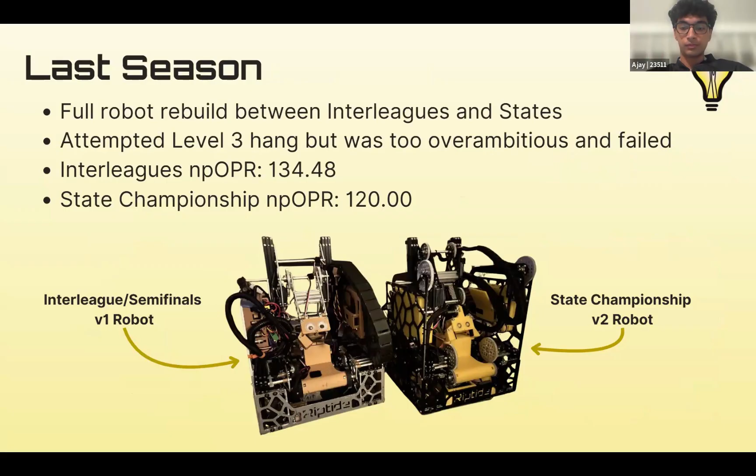And this planning change really helped us because we're able to try out these mechanisms in a low risk setting, and then better implement them in season, as we did with Swerve, which we'll talk about. The other thing with hardware is we really tried to make our mechanisms as modular as possible, so that we could iterate on them without doing a complete rebuild.

Ajay mentioned we did a full rebuild from interleagues to states last year, which was less than a month. And we found that redoing everything from scratch took a lot of time, and it wasn't as efficient because we were only making minor upgrades. So this year we tried to mount our mechanisms in a way such that from the very beginning, we're able to quickly take them off, improve them, and then reattach them to save as much time during season. And then Arush can talk a little bit about the software changes we also made.

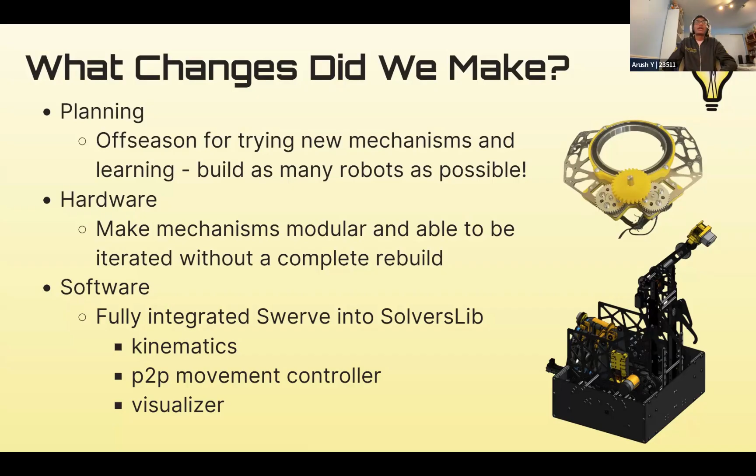So one of the major projects we took on this off-season was making a multi-chassis. With modularity in mind, this chassis has about 75 different mounting holes throughout. You can see some of them, especially on this back plate here. It has 4 different configurations for our hub mounts, from all of them on one side to what you see here with one on either side.

There's 3 different places for mounting odometry. Though we use 2-wheel with Pinpoint, it allows us to essentially mount the wheels in a way that this robot can work for any design. The point of this multi-chassis is essentially to function for any different archetype of robot. It can function as a swerve drivetrain or a mecanum.

And it's kind of similar to the strafer chassis in that way where you can put essentially anything on it, you can turn it into absolutely anything, and this robot can work for basically any season. So the reason we did this in the off season was essentially to limit the amount of time we need to work on our robot during the season. We don't have to design a drivetrain if we have one that works for essentially every season, built in the off season. So that was one thing we made.

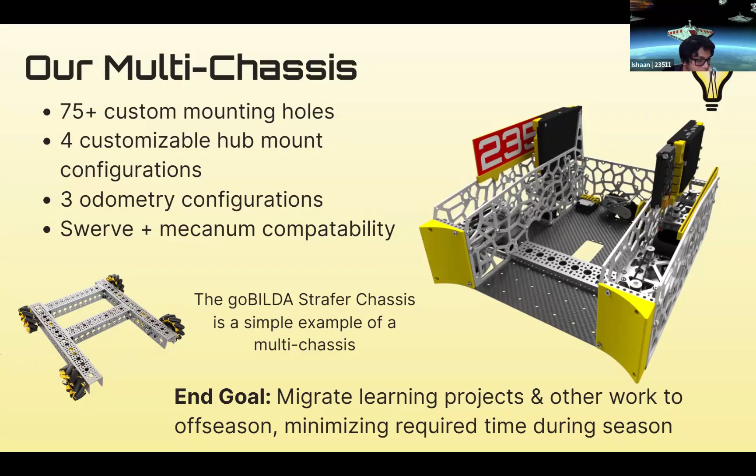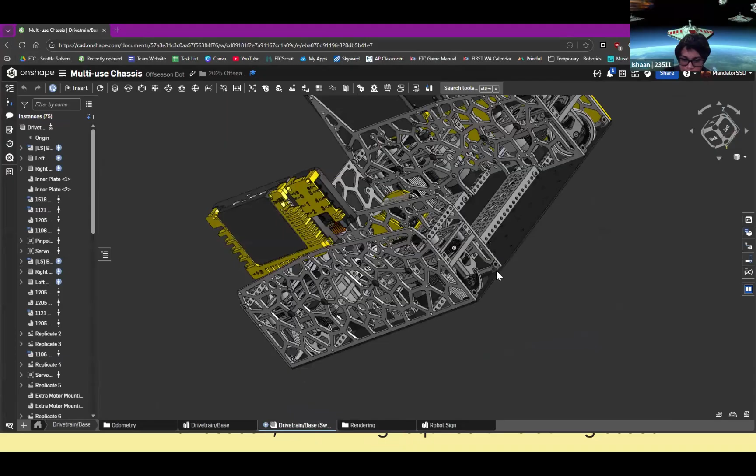So I'm actually going to give a bit of a CAD walkthrough on this one here. So first, let's start with the actual drivetrain here. So you can kind of see this is the multi-chassis I was talking about. This one has swerve modules in it. You can see on the bottom, like I was talking about earlier, you have those three odometry mounting points. These cutouts for swerve module, which you can use either mecanum wheels or swerve on.

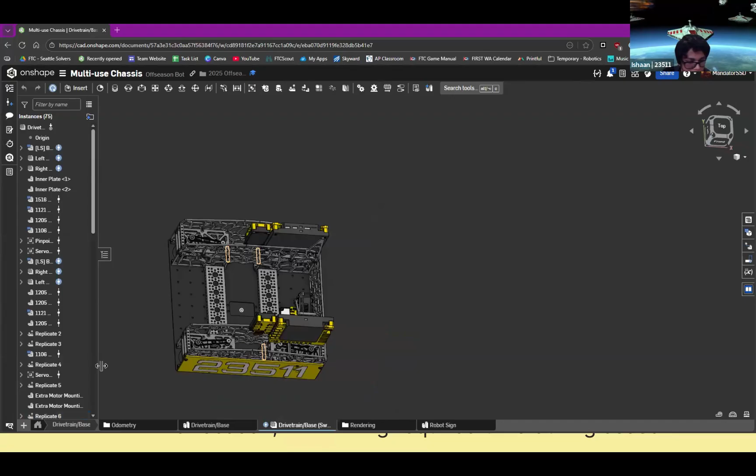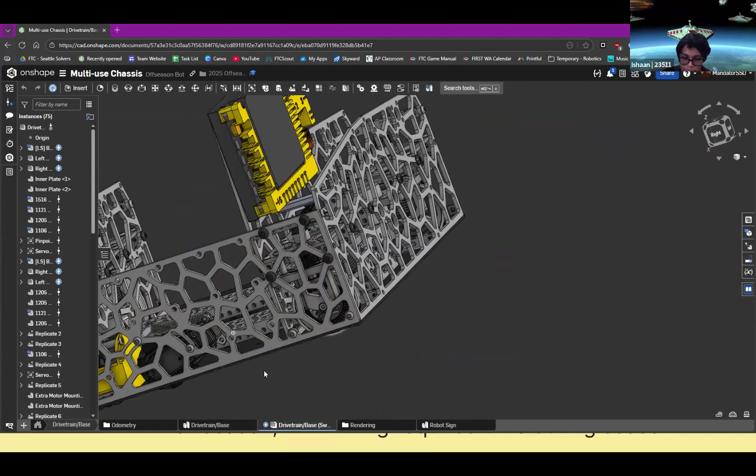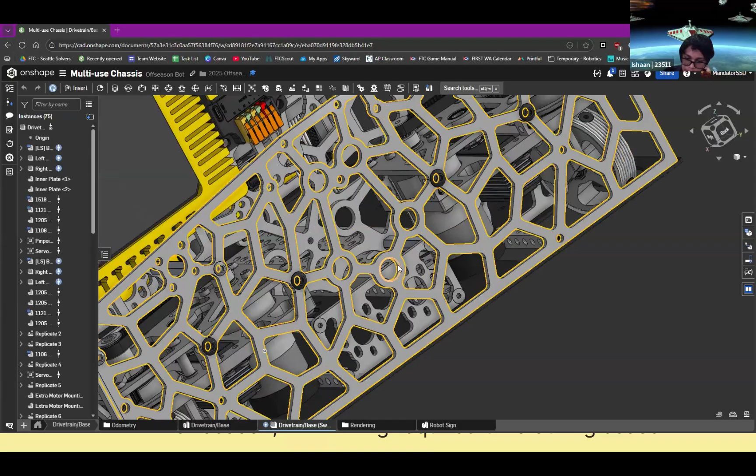With this robot, all these mounting holes, we don't have to do that because we can essentially make any change to this robot. We can move things around. We don't need to worry about recutting new plates or anything like that. So it's kind of like a strafer chassis, except you're getting all the benefits of a parallel plate drivetrain and the custom weight savings and everything in this drivetrain here. So best of both worlds.

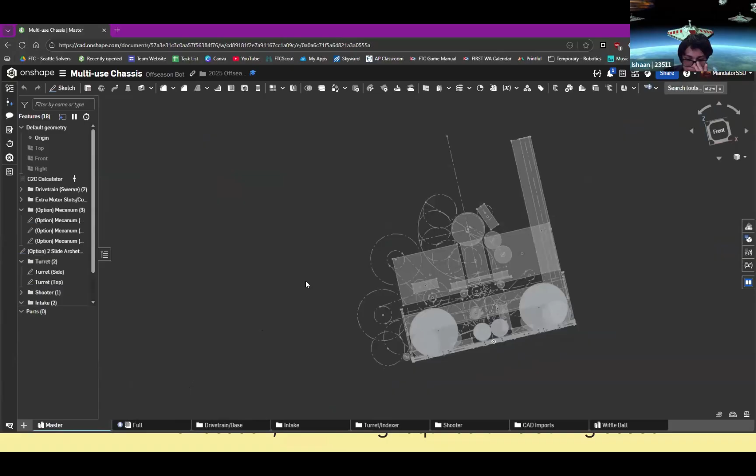So we're going to go into a bit on how we planned out something like this. So this is a master sketch here. For those of you who don't know what a master sketch is, it's essentially a series of sketches that allow us to plan out our robot without building it physically or without having to design the full thing. Do this before making the robot. It allows you to plan out where you're going to put every single item here.

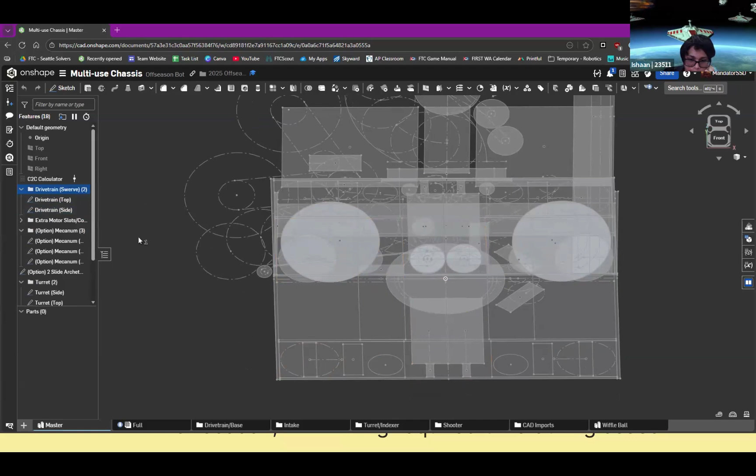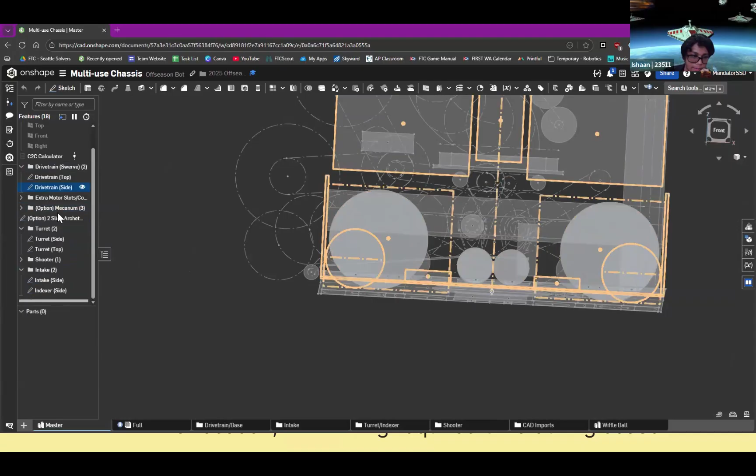So you'll see we have a bunch for our drivetrain here. You'll see lots of different pulleys throughout, right? So you can essentially mount anything here. These are all major points we could find for different archetypes. So on the side you'll see we have turret, shooters, slide archetypes. So last year the main one was the two slide archetype in Into the Deep, right? That was what we used in our robot.

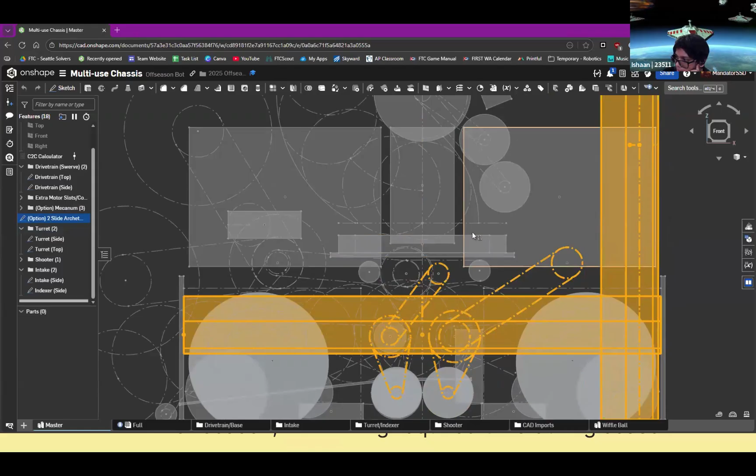And you can see here, we kind of planned for that even with our robot this year. We want to make it able to function for that. So we added all these different bearing holes for pulleys and things if we ever have to make a robot like that, right? So I'm going to open up the plate so you can see kind of how it affected it.

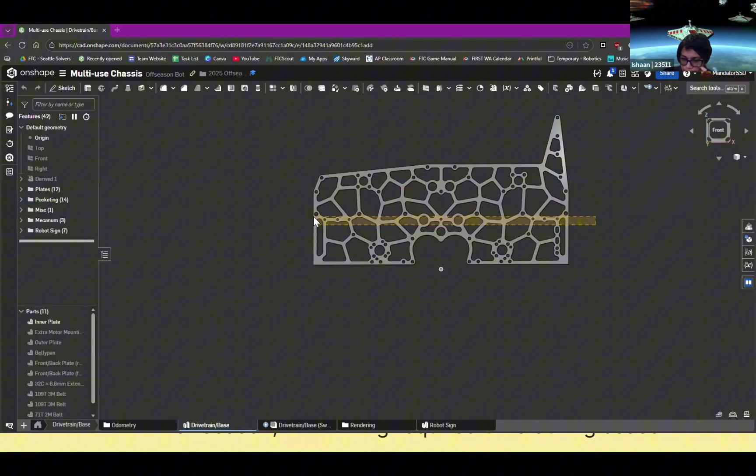So you can see here, these are the vertical slide mounting holes right here. This entire top lip of this plate is just to account for the vertical slides. And same thing for these holes on the bottom, this line of vertical holes. That's all just for horizontal slides right here. You can essentially mount a 14-inch BWT link slide.

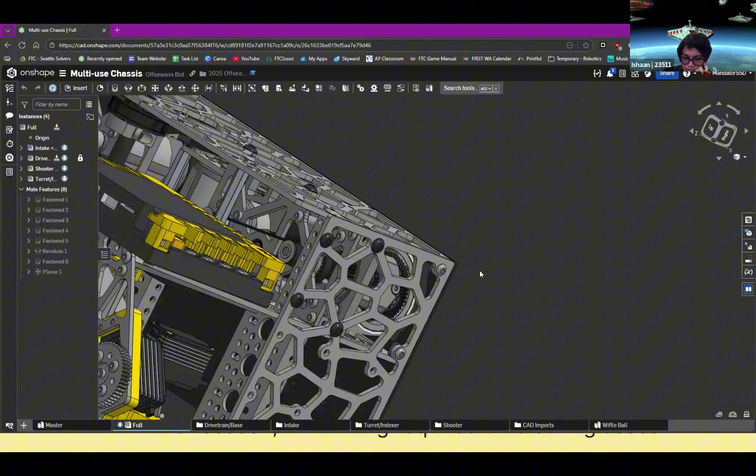Those are what we use on our robot, but you can essentially make a two-slide archetype on here, or you can do something like a turret and shooter kind of one. So this off season we actually tried to develop a wiffle ball shooter robot. So you can see here active intake and everything all mounted on the same chassis, right? So the general idea is you can mount essentially anything on here. One of the other things we focused on, like I said earlier, was mecanum versus swerve.

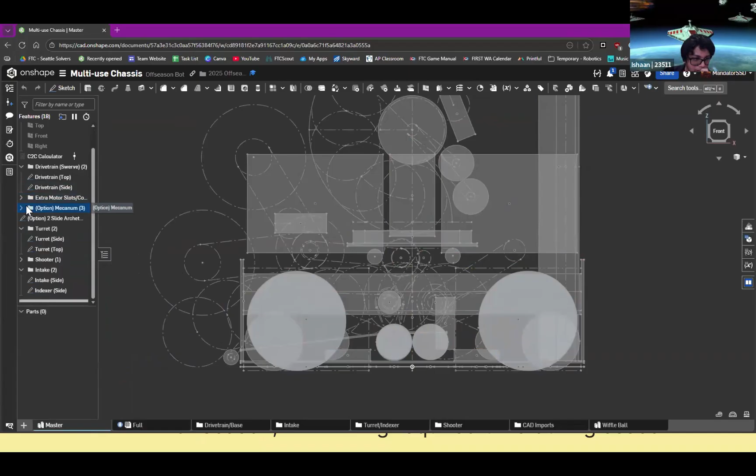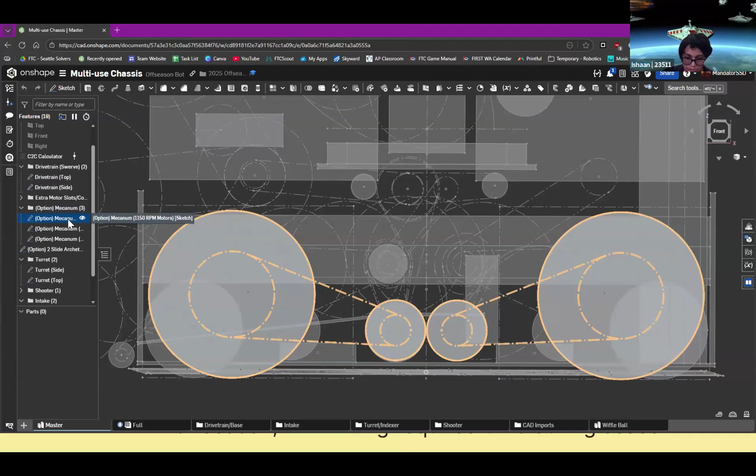So in the planning, we actually had to involve a lot of different options for it. If you want a chassis that can be used anywhere, you're going to need it to basically have a lot of different contingencies or possibilities for design. So one thing you'll see is we have three separate mounting options for mecanum, depending on what the robot needs to do or what else we want to put on the robot that might take up the same space. You have these essentially center-mounted motors here.

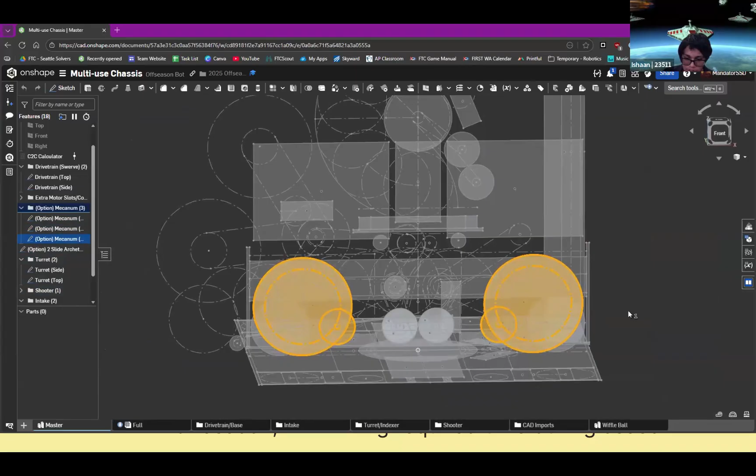Then you can have them mounted even higher here where you have two stages of pulleys, right? Or you can even go through a singular stage of gears. You have all these different options because you want this chassis to be essentially as modular as possible. So we can essentially build anything on this. That was the main focus here, modularity. This drivetrain is essentially something you can turn into absolutely anything, any type of archetype, any type of robot.

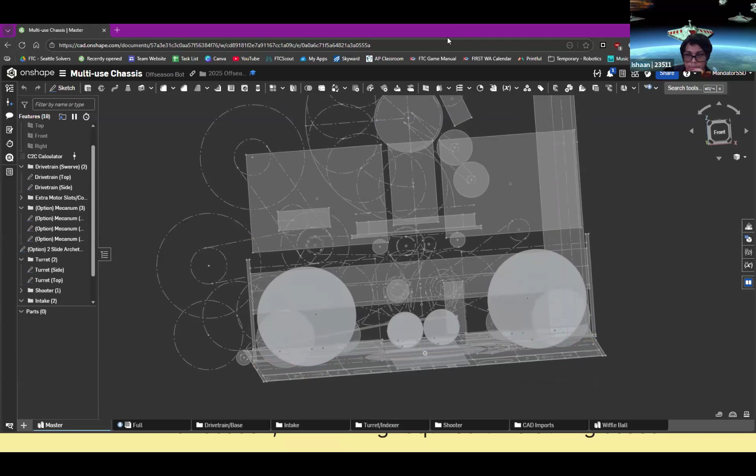So now Saket's going to tell you a bit more about the swerve. Yes. Yeah, I'm gonna share my screen to take over. Okay. A little bit before the swerve, Arush is gonna talk a little bit about the software planning that also went into our chassis.

So yeah, Arush. Yeah. So one of the biggest things that our team did in order to make our swerve successful on the software was working on our code without a robot. There's actually a surprisingly large amount of things that you can do without a robot to help you make sure that you can complete your tasks effectively. And this is really important, especially for us, because Washington has a very tight deadline. Especially after the first competition, you're going to have competitions coming out nonstop every 2 to 3 weeks.

So one large factor contributing to our success in early league meets is that we actually theory coded a lot of our systems early while our robot was still being built. One thing that we did was our launcher math. So this is getting the velocity from the distance of the robot and other similar things for our turret and our intake. This also includes structure for our files, as you can see in the bottom right corner, which is effectively creating folders and directories and entries to help organize our code. This can all be done without our robot.

Additionally, teams can also learn about libraries. This is things like popular pathing libraries like Pedro Pathing or Roadrunner, or command-based libraries like our very own SolversLib or alternatives like NextFTC and Mercurial. And then teams can also integrate them with each other and also create autonomous paths with visualizers beforehand, to make sure their team has enough time to actually test out everything.

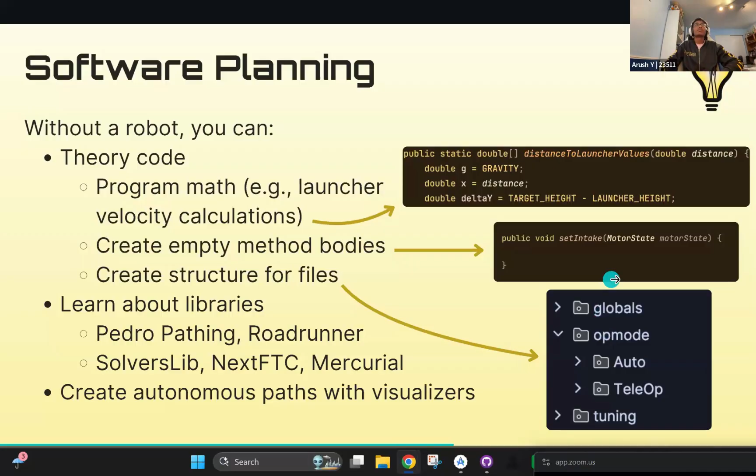Yep. So moving on to specifically swerve, how we were able to implement a complex mechanism. So there's going to be an overview of what we did with swerve. Firstly, if you don't know, swerve is essentially four different high traction wheels that are able to rotate in any direction, and they give you increased traction and movement speed in all directions compared to mecanum, which can be inefficient while strafing or moving diagonally. And we really wanted to try it out because it would be potentially useful across seasons. It wouldn't be just used in one season, but theoretically you could use it every year,

just like how teams use mecanum every year. However, it does come with a lot of difficulties because you are running 4 extra servos and sensors for figuring out where the wheels are actually facing. And all of these need to be operating efficiently all the time in both hardware and software. In hardware, this means your power transmissions need to be efficient, so you're not pulling too much power. And in software, you need to make sure you have good loop times, which Arush will talk a little bit about how we optimized, so that we have precise control over where the wheels are facing.

So all in all, this adds a lot of complexity for just having the basic functionality of your drivetrain moving. So it took us a lot of time to actually make this possible. We actually spent our 2024 off season developing our swerve drive, but we saw that it had issues with power draw, with accuracy, and also in software as well, so we weren't happy enough to use it in season.

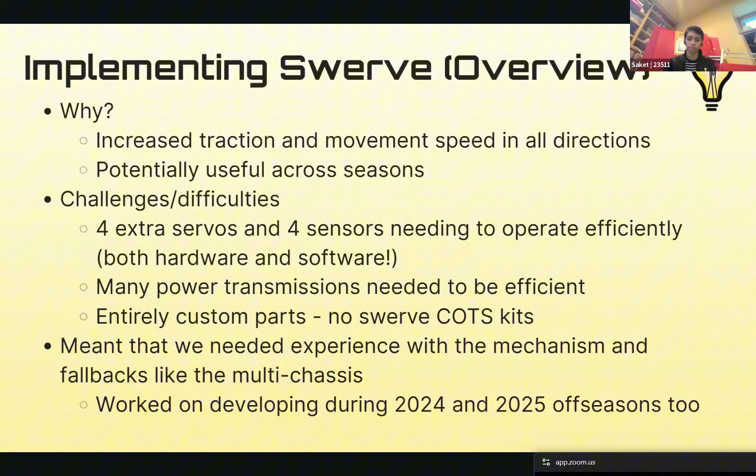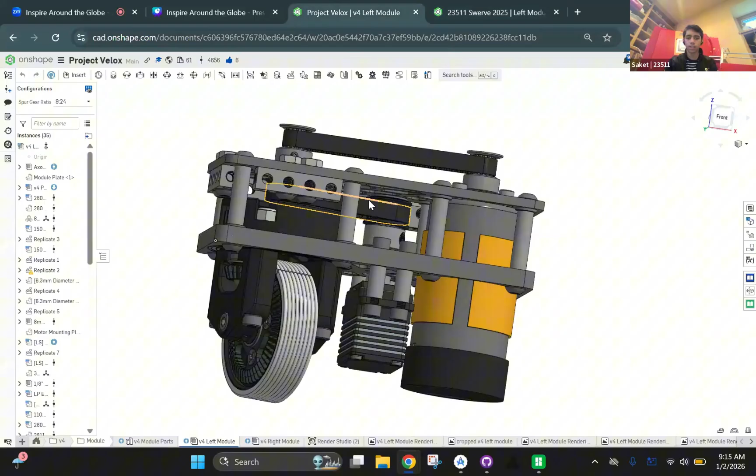So, like Ishaan did with the multi chassis, I'm going to talk a little bit about our 2025 Swerve module. I'm not going to go too much into our 2024 module, even though it is public. But the 2025 module, you can see it's slightly bigger, but you can see it has a lot less screws and nuts, which is something we really tried to focus on in trying to make our entire swerve a lot more modular and accessible.

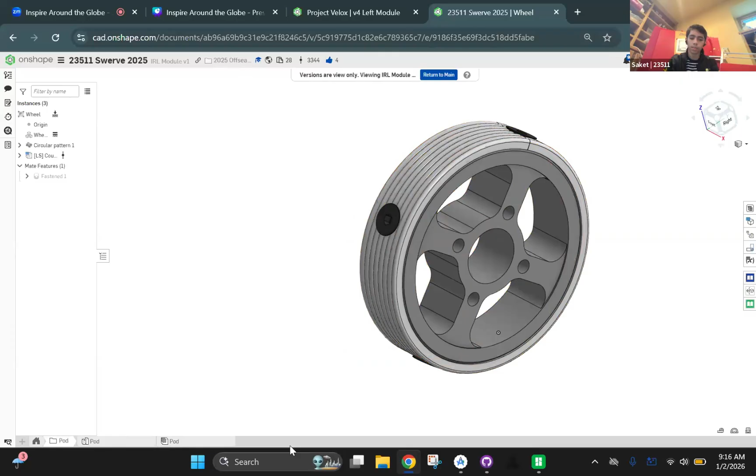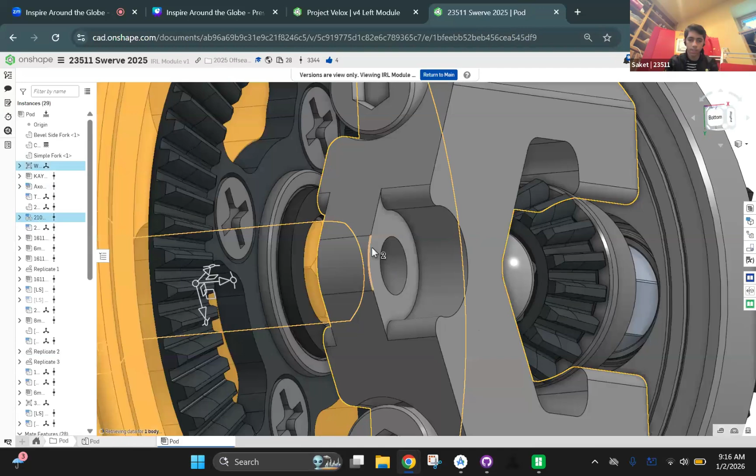Starting out with how we make this modular, we actually split up our entire swerve module into three different parts. So we start with the lowest level, which is the wheel. This is just a simple aluminum wheel with some tread on it, but you can see that it's modular within the next level, which is the pod. So by removing this screw and this screw, if we hide these two screws, in real life, you'd unscrew them. This entire axle over here and the wheel that's on it are basically able to slide out from the bottom. So we actually have a slot over here that allows you to just take this entire thing out the bottom.

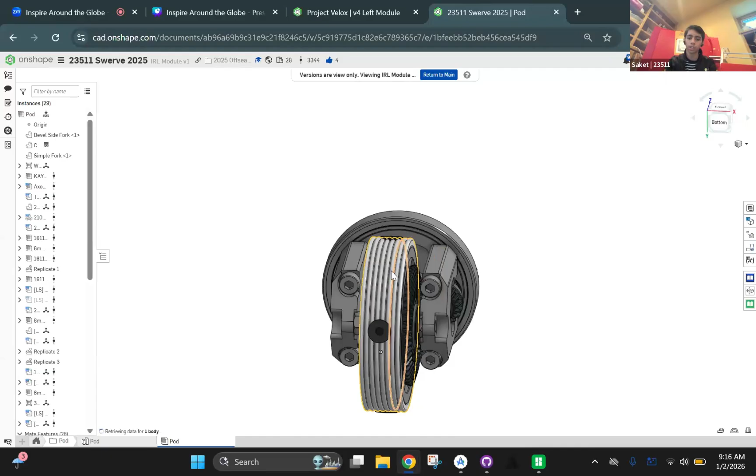And we realized that using accessibility through the bottom of the robot was going to be very efficient because a lot of the times you have stuff on top of your swerve modules or on top of your mecanum wheels on your drivetrain. But there's not usually much happening below your robot. So we kind of made everything accessible from the bottom.

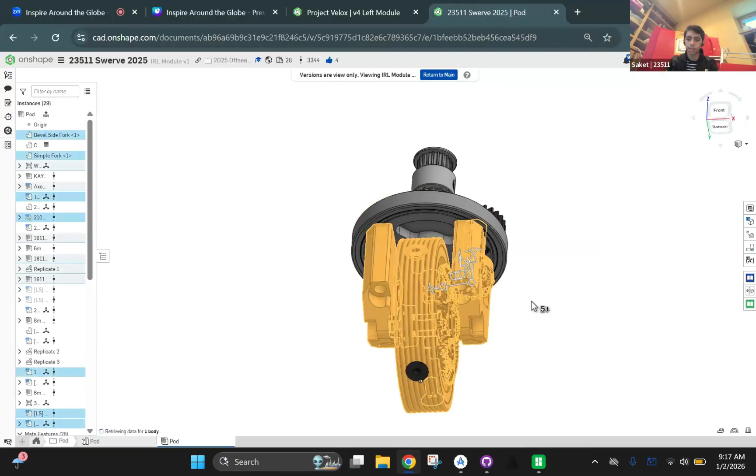This also means that not only do we have the wheels modular like that, if you unscrew these four screws, then we're essentially able to take out everything on this bottom half. So everything over here is just able to slide out and we're able to access anything. So if we need to replace the tread, tighten any screws, anything like that, we're able to have access to that. But it doesn't just stop there because we go further in the next step of the module.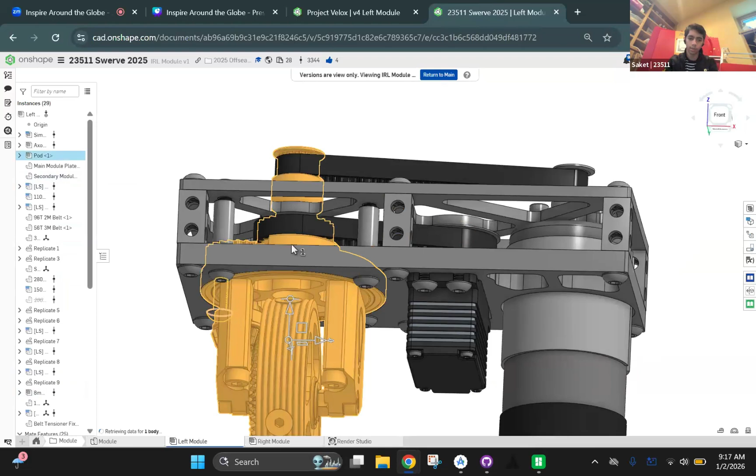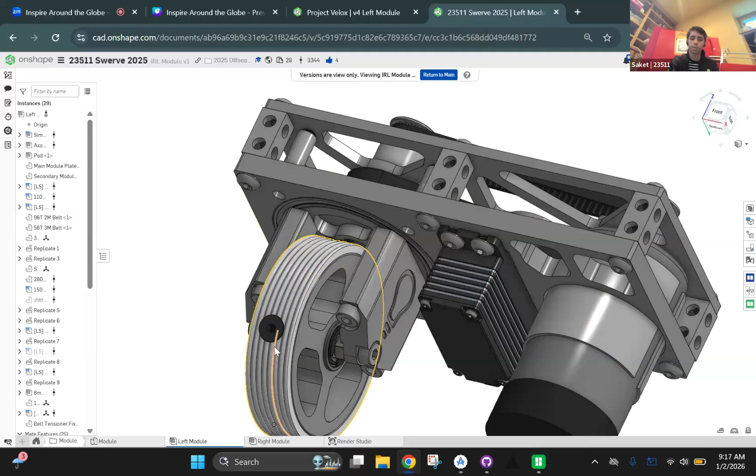We're actually able to take out the entire pod, so that entire previous subassembly. If you loosen some set screws at the top and you remove these four screws, again, accessible through the bottom, just so that we have full control over being able to remove things. So if we hide these four screws, there's actually nothing constraining the pod from just being slid out the bottom. And again, we're able to access anything. So if we want to re-grease the gears for higher efficiency, we can through that. Or if you need to tighten any screws inside here, it just makes it a lot easier to do all that.

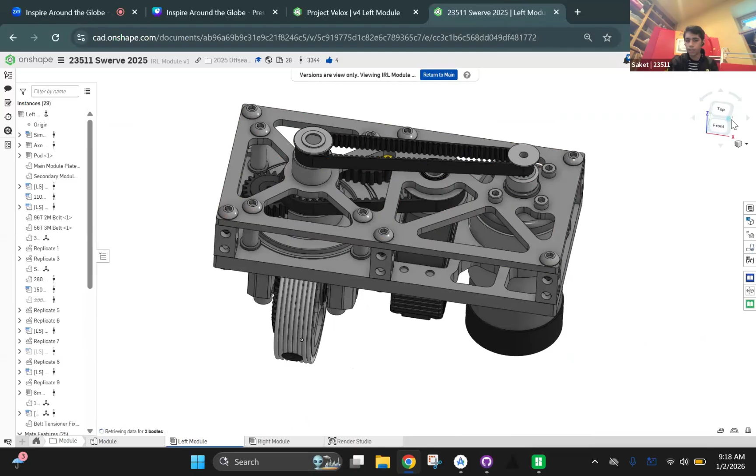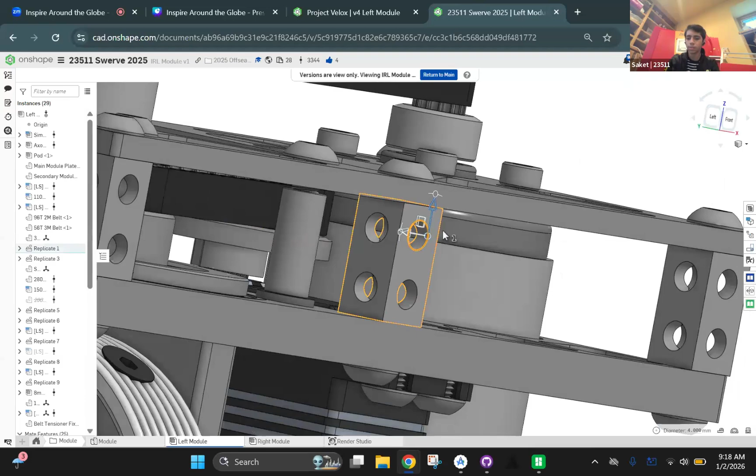And then finally, at the highest level, this entire swerve module is designed as a module and not directly integrated into a drivetrain which has one big plate with all four wheels and everything mounted onto it. Because we wanted it to be able to be replaced with these side mounting screw holes with these square beams. So this allows us to essentially unscrew the swerve modules entirely.

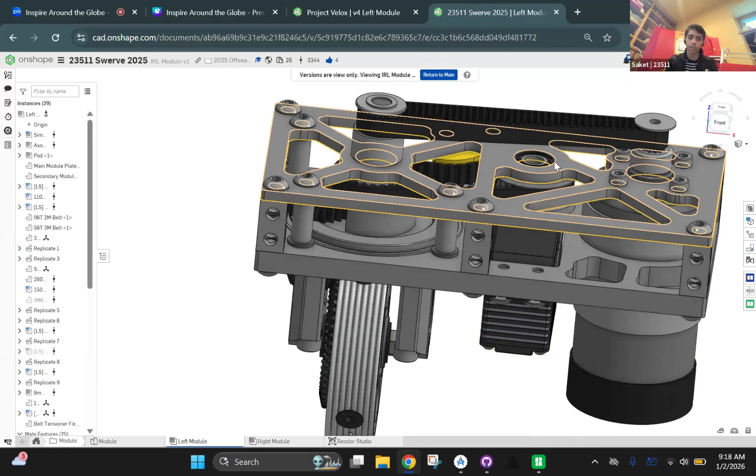So if we want to completely replace the module and replace it with mecanum, or if it's just sometimes easier to access, for example, the servo over here, if you take out the entire module, we also have the ability to do that. So this just gave us a lot of control over the previous year, which had a lot of different screws that made it hard to access. It was also more compact, so it was harder to reach in there. So these were all improvements that we've made.

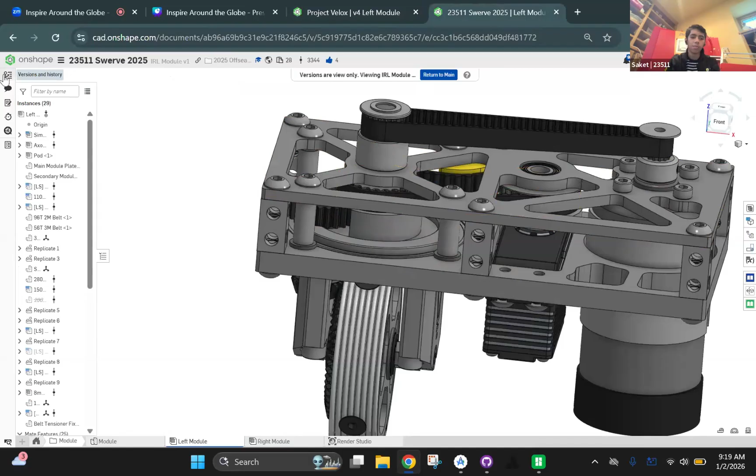But this isn't ending here. Because of this kind of modularity, we're actually able to improve our swerve even during mid-season. So currently we're planning to replace the treads that we currently have with a new molded tread.

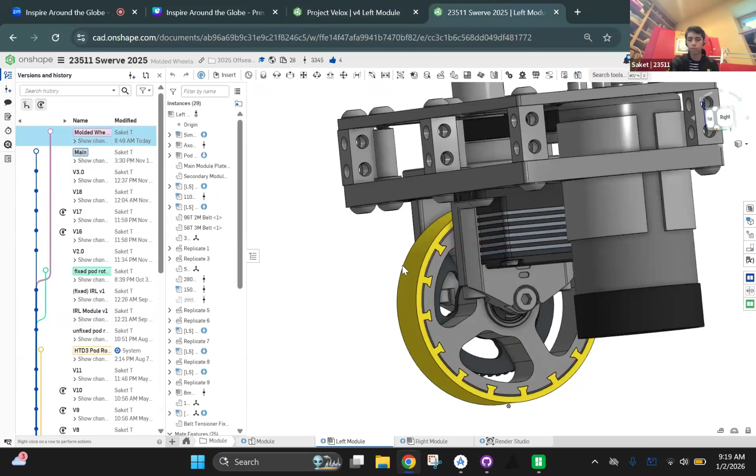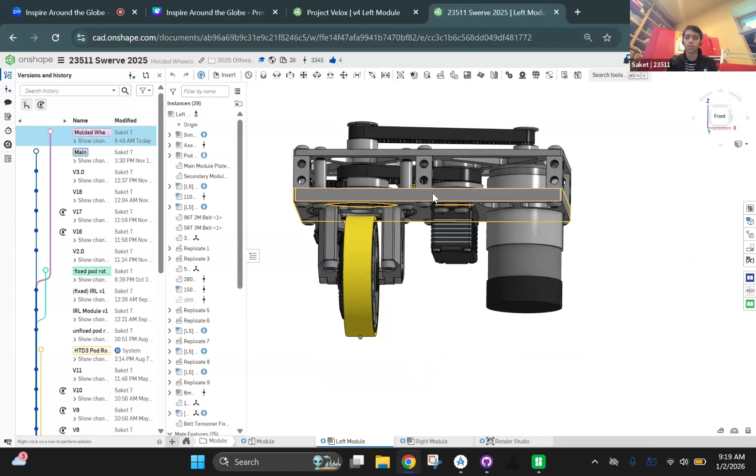So you can see we're going to replace the wheel with a custom molded urethane tread. And this is possible because during the season, it's only going to take us maybe an hour to replace all four wheels, because we can just unscrew these two screws, replace the wheel, and then pop it back in, rather than having to design the entire swerve in a way such that you have to take everything out to access it. So this is something we're still doing in progress, and it's just one of the examples of how modularity can help you.

Now Arsh will talk a little bit about the programming side of how we made swerve efficient as well. Yeah. So the first thing that our team did when working on the swerve on the programming side was create the kinematics for it. So we started off by simply using Desmos to derive the kinematics with first order. However, we found out that these theoretical kinematics, when implemented in code, simply weren't enough. We had to optimize it. This is a really big issue because with swerve, you have a whole motor and a servo for each module. So you have a lot more hardware to deal with.

So some of the things that we use for optimizing our code is that we use something called slew rate limiting to handle gamepad inputs and make driving smoother, as well as determining when we should actually be turning the pod itself with the servo or actually setting a motor power.

Then to actually control the swerve, we implemented a P2P, also known as a PID to point, which moves in simple straight lines. We didn't want to opt for more complex curved paths because they were going to take a longer time to develop, and this was something simpler that could easily be done in the off season, which would give us plenty of time to prepare for DECODE season. So the way this works is this uses a PID controller for the heading, another PID controller for the translational movement, in order to accurately move the swerve drivetrain from one point to another point. And we found that this was all we really needed in order to get a consistent yet simple autonomous.

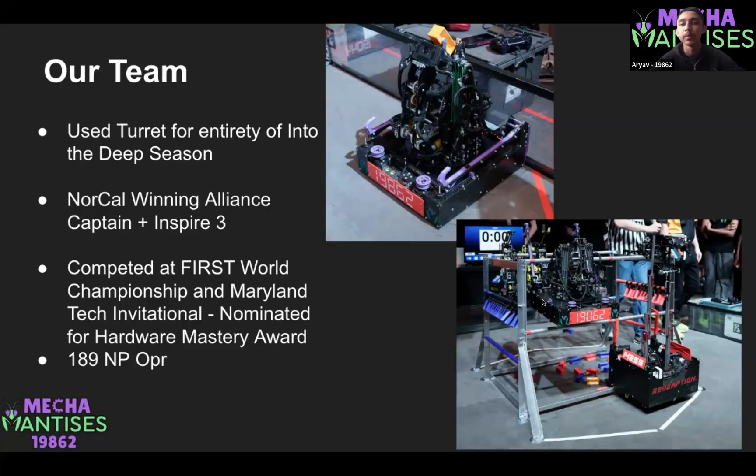So these are just some pictures from our competitions. We were also able to achieve, as you can see over here, the level 3 ascent with our turret, which is a big part of making our turret stable and making sure it's robust enough to lift our entire robot. So now I'll be moving on to why we chose a turret.

What it allows us to do is have a full degree of freedom for picking up samples. On the right over here, you can see a short video of our turret from the Into the Deep season. If there's a large range of samples in front of our robot, we were able to turn and use our horizontal extension, which was also mounted on our turret, to effectively pick up the samples.

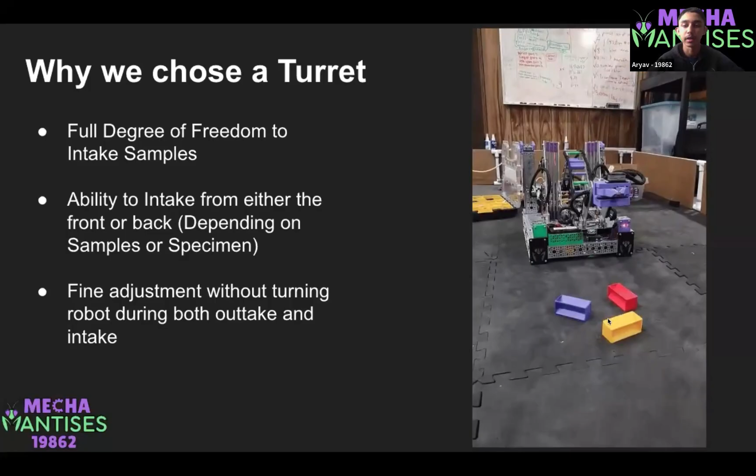We also had a Limelight 3A camera on our turret so that we had something called a hover mode where we could hover over a set of samples, and we had an algorithm that would allow us to choose which color depending on our alliance, and also prioritize yellow samples compared to blue and red samples, depending on what alliance we were and if we were doing samples or specimen.

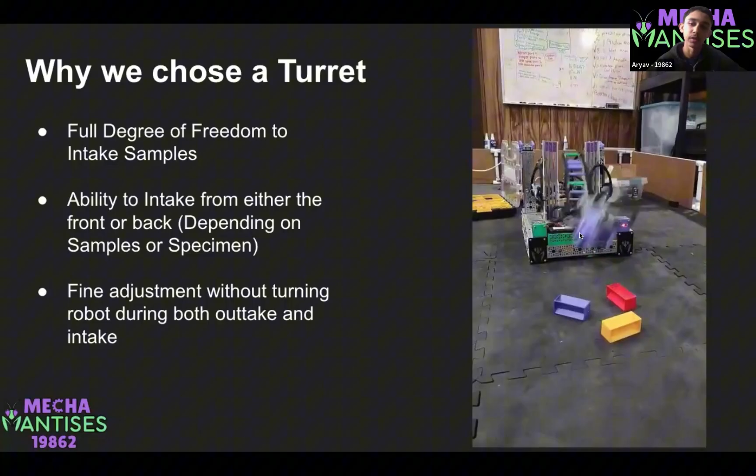It also allows us to intake from both the front and back. When we were doing samples, we would intake from the front so that we could deposit from the back. But when we were doing specimen, we would intake from the back and then deposit from the front so that we could also intake again when doing specimen.

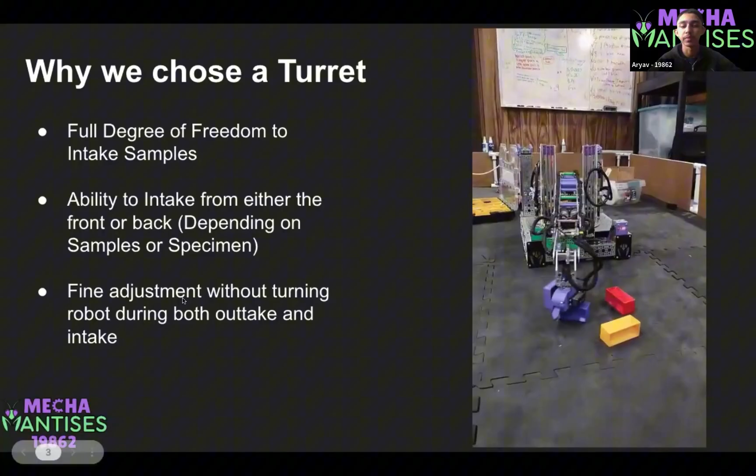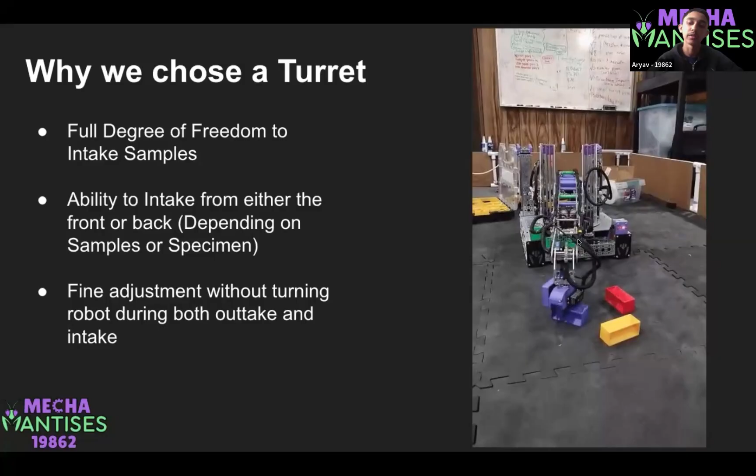Another benefit of having the turret last year was to have a fine adjustment without turning the robot during both outtake and intake. Many teams last year had a mini turret on both their intake and outtake, and this would require two separate mechanisms. But we could do both with just one main turret on the base of our robot, so that we could turn while both intaking and outtaking.

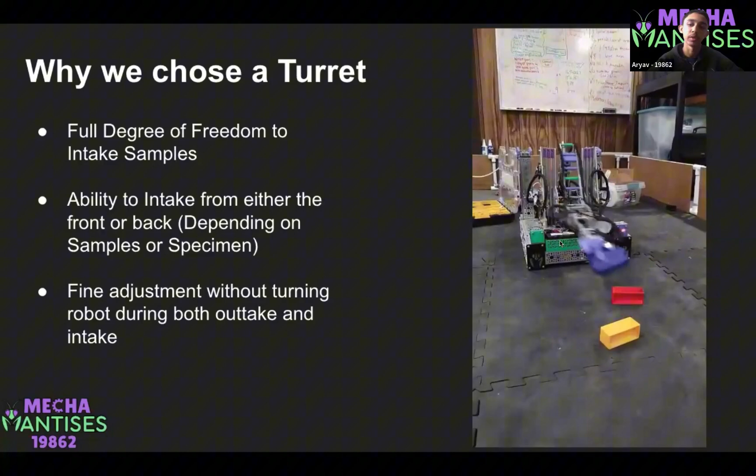Overall, we chose the bearing stack turret from the get-go because we thought it would be more robust and easier to maintain and service, since each of the individual bearings could be replaced during the season. And we also found it easier to power with the pulley in the middle.

Okay, so now I'll be talking more about the bearing stack turret. The bearing stack turret essentially makes a bearing sandwich. There's first a thrust bearing at the top, a radial bearing in the middle, and a thrust bearing at the bottom. The reason we have this is because the thrust bearings take axial load, meaning all the forces coming down, so it's easier to spin on that.

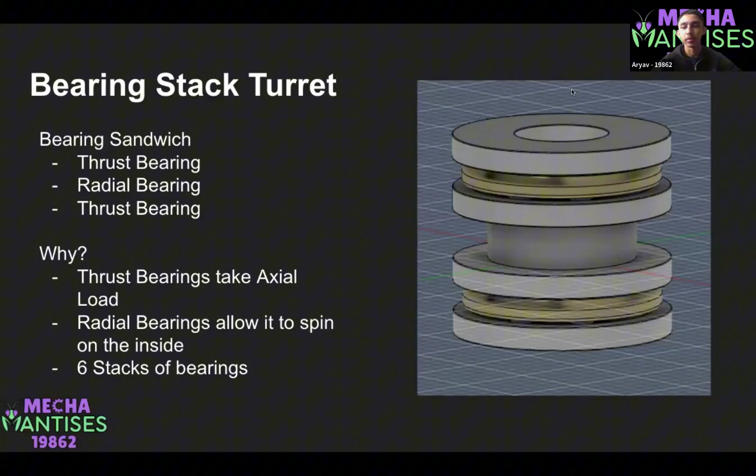We had a total of 6 stacks of bearings. This was just a preference, and it worked well for the entire season. These 6 allow us to spin on the inside, and we can run a 6 mm goBILDA standoff in the middle to support them. It makes it easy to maintain since you can thread into the standoffs if you want to replace the turret or any of the bearings.

These are some specifications for our turret. For the thrust bearings, we use the goBILDA 6 mm ID and 14 mm OD. For the radial bearings, we used this bearing off Amazon, and I can send the link to the slideshow. We also used the goBILDA 6 mm outer diameter standoffs, and the length depends on design needs. We chose the length depending on how tall we wanted our turret to be, or if we wanted any space underneath for accessibility.

The large pulley and the small pulley are very dependent on your robot. We went based on our sizing limitations and adjusted the motor RPM. We ended up using a 182 tooth HTD5 pulley for the larger pulley, and a 22 HTD5 for the smaller pulley. Both pulleys were 3D printed, we ran a 9 mm belt, and a 435 RPM motor powering it.

We didn't really optimize the ratio on this pulley because we were limited by size constraints, but I highly recommend that you optimize the gear ratios for each of the pulleys. For the motor powering, we tried 312, 435, and 1150. The 1150 RPM motor had too little torque to turn our entire turret, and the 312 was too slow. So the 435 RPM was a nice middle ground for our robot and turning the entire turret.

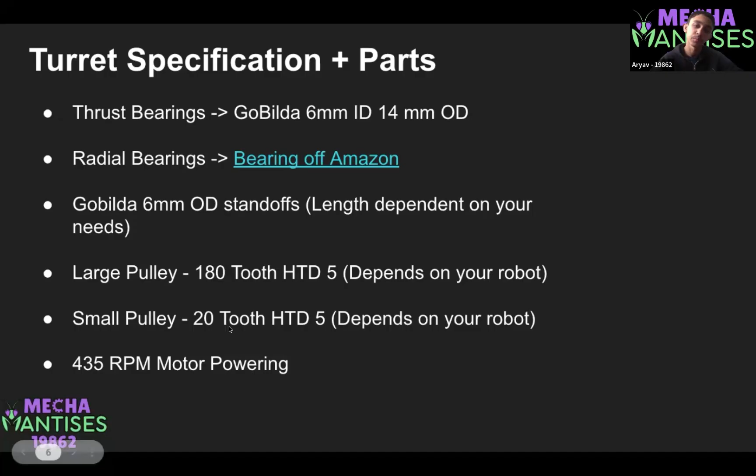Now I'll be talking about powering the turret. There are 3 main ways we found to power the turret. The first is using pulleys and belts, which is what we used for our Into the Deep season last year. The 2 other ways we thought of were using a chain and sprocket, and using gears, which is what we decided to do for our robot this year.

The chain is very similar to the belt. You don't actually need this gear, but we put it in one of our prototype designs. From this gear, you can run a chain across both of these sprockets, and it works really similar to a belt. For the belt, last year we first had a bevel transmission to get the 90-degree bend so that we could set our U channel at the front of our robot.

Sorry. And then we had a smaller pulley, as I was saying, this is a 20-tooth pulley, and then a 180-tooth pulley in the center. So this allows us to get the power transmission.

One thing that we would change from last year, if we could do this again, was removing the bevels, because this caused a lot of backlash in our turret, and it was not that precise because we were using the motor encoder in the turret, and we would remove these bevels so that we could just directly go to the pulley.

And then one more thing about actually localizing the turret, there are many different ways that teams do it. Later on in the season, towards the end, we put an absolute encoder on top of this axle so that we could get rid of the bevel gear backlash. And if we put an absolute encoder, this will allow us to home the turret more precisely.

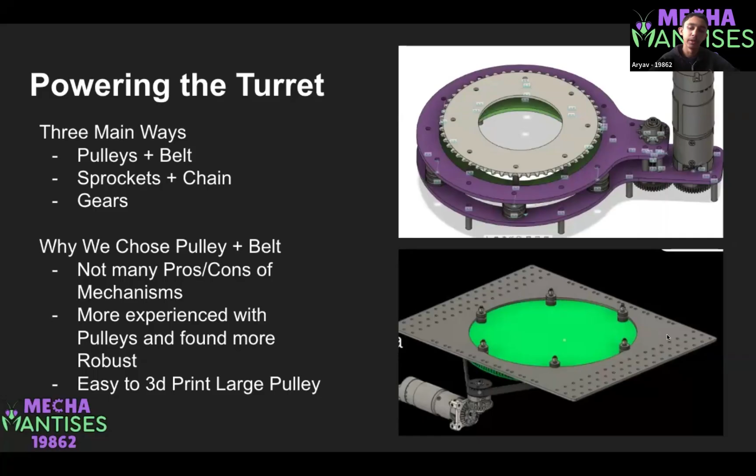The only problem with the laser cut turret is that you want the plate for the turret, this plate over here, to be very rigid. So that's why we chose to make it out of 3mm aluminum. We tried MDF, carbon fiber, and aluminum, and we found aluminum was the best because the carbon fiber and the MDF flex too much to actually be rigid for the turret. And you want this plate to be very rigid because this is where the bearings are rotating around.

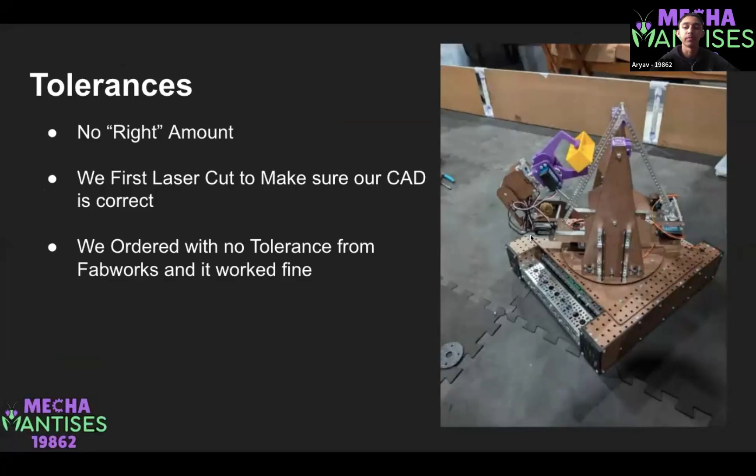And on top of the turret, we also chose to have an aluminum plate because we thought it would be more rigid. And the rest of the robot, if you see our picture from our very first slide, was made out of carbon fiber so that we could be very light for the level 3 ascent.

So now we're going to be talking about wiring the turret. There are many different ways to wire a turret, but last year, because there was no game element passing through the center of the turret, it made wiring a lot easier. So we could just run all our wires for our robot. We had over 7 servos and 3 motors,

and we could run all of these through the center of the turret. What this allows us to do is spin our turret more than 180, or I think we limited ourselves to 270 degrees, so we could do a full 360, but we could actually do more.

The only reason we limited our turret is because the more you keep spinning in one rotation, the more tangled your wires are going to get in the middle, and that caused a lot of stress and disconnection since we had connections in the middle of our turret. So we decided to limit ourselves to 270 degrees so that we didn't have to rotate more than we need to.

Some solutions, if you were to wire your turret through the center when there are no game elements passing through like last season, is to use a slip ring. We actually tried using this last year but it became unfeasible because we had way too many servos and motors. A slip ring is just a device in which you can turn the end as much as you want, and essentially the wires won't get tangled.

The reason this is really good is because you can continuously spin your turret past 360, even multiple rotations at a time, and your wires won't get tangled, and it'll just be a lot easier to wire, and you don't have to worry about disconnections or anything like that.

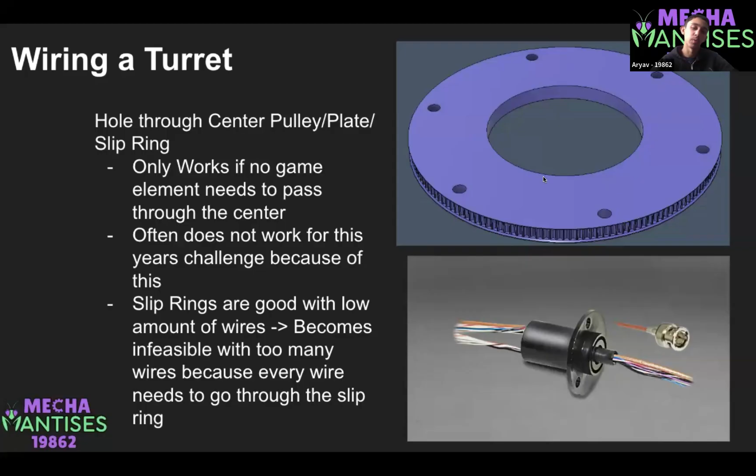And now I'll be talking about how to wire if you have a game element that's running through the center. This season, a lot of people who are using turrets will have the artifacts going through the center of their robot. This is just an image of Theseus, which I saw had a really unique wiring solution.

There are two main ways that you can wire a turret from the outside when you don't have wires passing through the inside: using a cable chain or a badge retractor. What this allows you to do is have a really nice guide for the chain. As you can see, the cable chain wraps around, and they can rotate their entire turret up to 360 degrees or maybe a little bit less, and then rotate it back around when they need to.

The only downside to this is that you can't do multiple rotations because you're physically limited by the wires. So that's one thing you need to consider when doing software. One solution that our team found, because we ran into the same issue, was having wraparound logic. Once it turns 360 degrees and physically can't go, and your robot is continuously turning, you can just wrap around to the other side really quickly.

So that's why you see a lot of teams whose turrets do full 360s in the middle of the match. That's just to deal with the wraparound. But this won't allow you to do more than 360 degrees of rotation at a time because it'll stretch the wire and then it'll just get hardware limited by the cable chain. Another idea, if anyone's heard of this, is badge retractors.

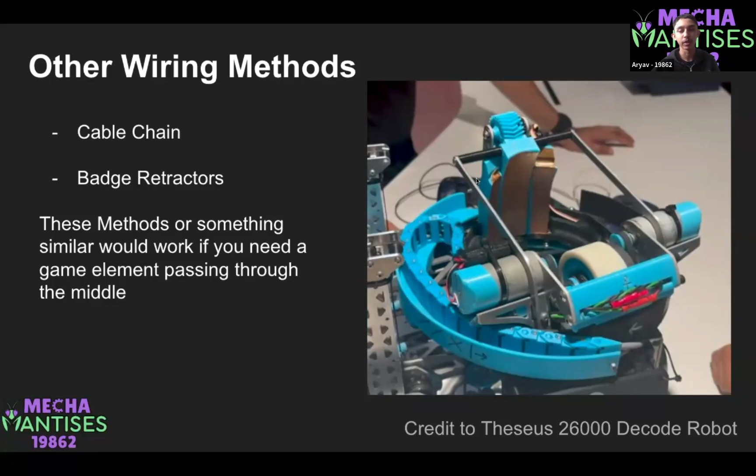So we actually use this on our Into the Deep robot, not on the turret, but on the slides. So I'll just go back to the plan. If you see over here, we had these badge retractors, and they would hold in our wires so that when our slides would extend, the wires could extend too, but when they come back down, they get held in a loop over here. So that's one unique way that you could wire your turret or actually any moving mechanism.

We have a lot of these badge retractors, and whenever we have wires that are hanging around, we make sure to tie them back in so that they're nice and compact when our robot's not extended, but they also allow our turret and our slides to be extended during the match.

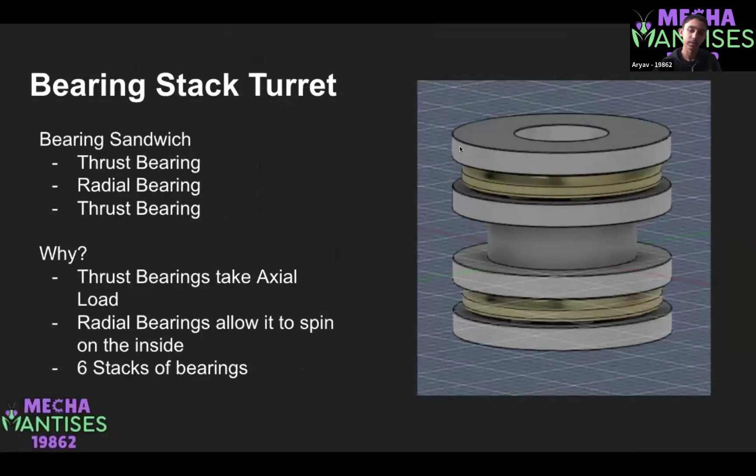We can continue with Team Curiosity. Awesome. Thank you. Can you see my screen? Yeah, now I can see your screen. Awesome. Sorry guys about that. Thank you. Okay.

So hello everybody. We are Team Curiosity 11770 from Los Angeles, California, and we go to Marlborough School. We are so excited to be presenting on the engineering portfolio today. If you have any question at any time during the presentation, please write them down or put them in the chat and we'll be answering them after the presentation.

So first of all, you might be asking, who are we? We're a robotics team of women and gender minorities from Marlborough School in Los Angeles. Inspired by our namesake, the Curiosity Mars rover, we believe in making an impact through exploration, innovation, and most of all, collaboration. We were given the first place Divisional Inspire Award at the World Championships in the Into the Deep season, which is given to teams that best share their experiences, enthusiasm, and knowledge with other teams, sponsors, their community, and the judges. We also have our other past awards listed up on the screen.

In this presentation, we'll be focusing on our experience creating an engineering portfolio and our advice for success. In the last few seasons, teams were asked to create a 15-page engineering portfolio to exhibit the important parts of their season. We'll talk about the guiding principles we followed when creating our engineering portfolio and some tips and tricks for creating yours in the future. And although the portfolio as of this season is no longer mandatory, we still recommend creating one so you're able to encapsulate your team and all the hard work you put into the season.

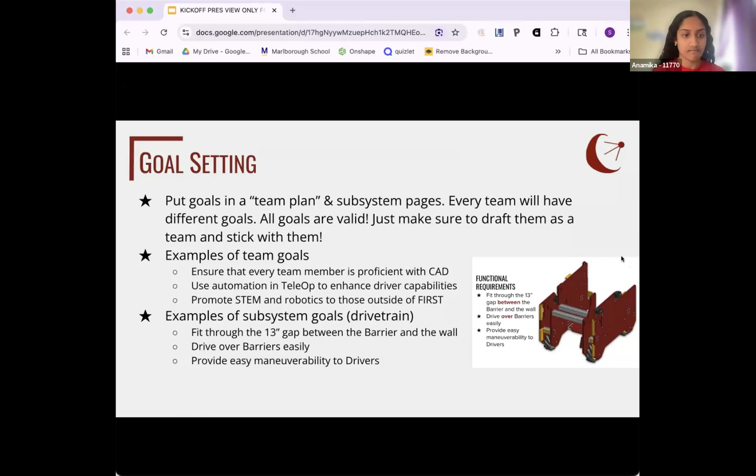For the outreach slides, you want to showcase the mentors you connected with that impacted you and the impact you had on your community. Including lots of pictures, especially of in-person events, is a really great way to convey your outreach. Don't just talk about what you did, highlight the impact you had and why it's important. Also, highlight your lessons learned from your mentors and especially how what you learned impacted your robot design, code, or how you work together throughout the season.

Let's get into some more tangible content you can include in your portfolio. You want your portfolio to showcase your design process throughout the season. Tying images into every page creates a more visual and detailed story. Early mechanism concept sketches, multi-view drawings, prototypes, and CAD model screenshots can help judges understand what you did during the season. It's also helpful to provide a small description of each image so judges know what they're looking at.

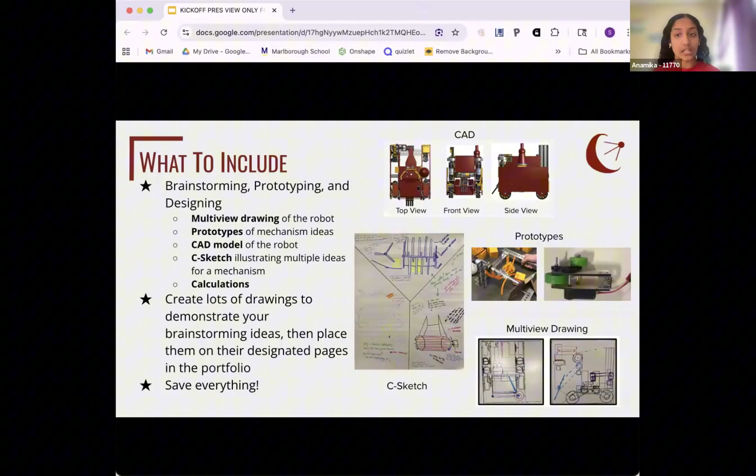Sorry, my window just disappeared.

The design process. So the portfolio is a crucial tool in communicating your design process to the judges. Robot-specific pages of the portfolio should thoroughly document the design process, making it very clear how you got from the initial idea to the final iteration of a mechanism. There are a few important aspects of the design process.

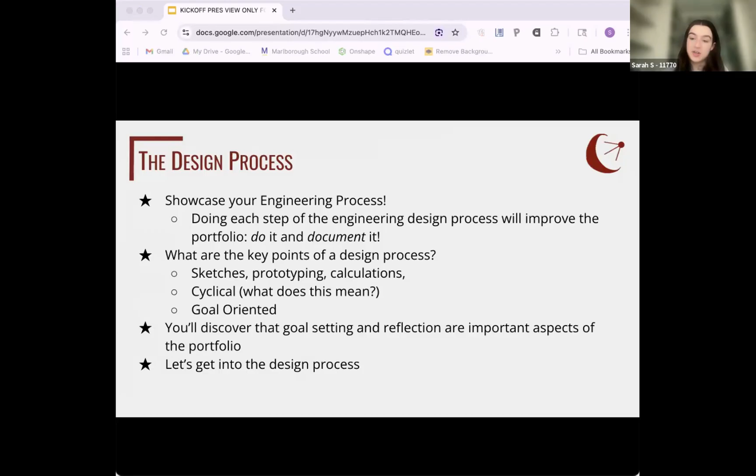What do you guys think it means for a design process to be cyclical? Pretty much, this is just making sure something is repeatedly being revised and making it so the original design isn't the final one, just kind of continuously iterating through it. So the design process should be based on your team's goals, which the portfolio should be centered around. So we'll go over the actual design process that our team follows.

Are two mechanisms not working together? Are you struggling with programming? Keep researching, trying solutions, and improving. You should document this process in the portfolio while keeping in mind your team's goals.

We don't come up with our mechanism ideas in a vacuum. Research is really important and helpful. We found a lot of other robots on YouTube and try to ask other teams lots of questions. If you found significant inspiration from another team's design, it's important to list that in your portfolio to be a gracious professional.

As well as including images of the physical aspects of your robot, you should also provide explanations and evaluations of them. For example, in the planning of a robot arm, you could show a calculation of its torque, a chart of the design's pros and cons, and some data about how often it succeeds or fails at its goal in the game.

Although the regular engineering notebook is no longer required, it is important to maintain that level of documentation to make sure you have the material you need to create a thorough and accurate portfolio. Timelines and other detail-heavy features are also great for illustrating your process, so writing down dates and milestones will be useful for keeping track of for later.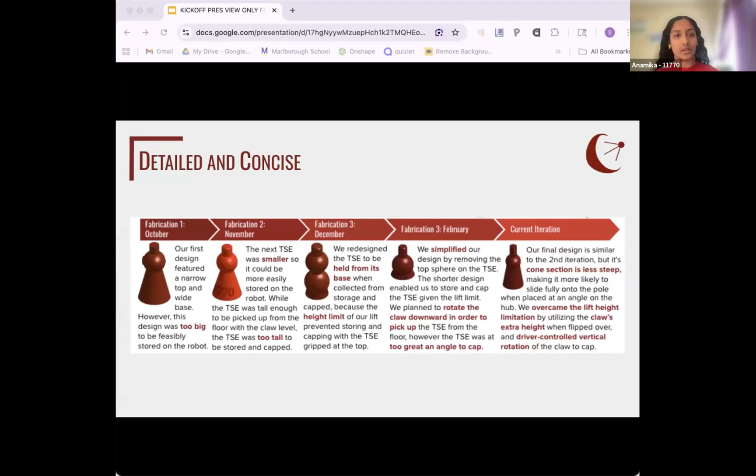We also played with font, text color, size, and bolding throughout the notebook, and ultimately decided to bold and change the color of the most important concepts. Play around to see what is clearest and looks best in your portfolio. In addition, we added lots of images to show off the evolution of our team scoring element and its CAD models, while also adding a description of the major changes we made at each step and emphasizing keywords and concepts. As seen on both this slide and the last slide, we put a lot of dates in the portfolio to show our continual revision process.

Aesthetic appeal is an overlooked aspect of the portfolio. It can be great to build a theme for your portfolio. Make space for your titles, stay consistent in logo placement, and keep a standard orientation for your text. One of the major things that can pull your portfolio together is a color scheme. As you can see in our presentation images of our portfolio, our color scheme is a variety of reds, some yellows, and a couple of grays.

When making a color scheme, make sure that all the colors are readable first and pleasing to the eye second. Using all neons might not be the best idea. Add fun and simple embellishments and experiment with transparency and shapes. Notice the timeline arrows in each of our mechanism pages, as well as the lessons learned boxes at the bottom of this page. These features subtly stand out and create a theme between pages, but don't draw attention away from the content.

If there's one thing that you should take away from this presentation, it's that your portfolio should always tell a story. This applies to the notebook overall as well as individual pages. The judges aren't expecting you to include every little detail, but making sure that your portfolio has a clear flow from start to finish is essential. Every team has a different strategy and a set of goals, so each portfolio will be unique.

Here you can see what our design process slides look like. The image-heavy timeline helped us display the overall story of our season. Last, but certainly not least, be yourself. These judges see dozens of teams a day, and you want to stand out.

Stay professional throughout the process, but don't be afraid to have fun with your portfolio and be creative about how you present your team. Pick a fun color, font, and layout theme that you think represents your team and stick with it. Throughout our portfolio, we sprinkled lots of fun images and inside jokes, many of which we believe contributed to our success throughout our seasons.

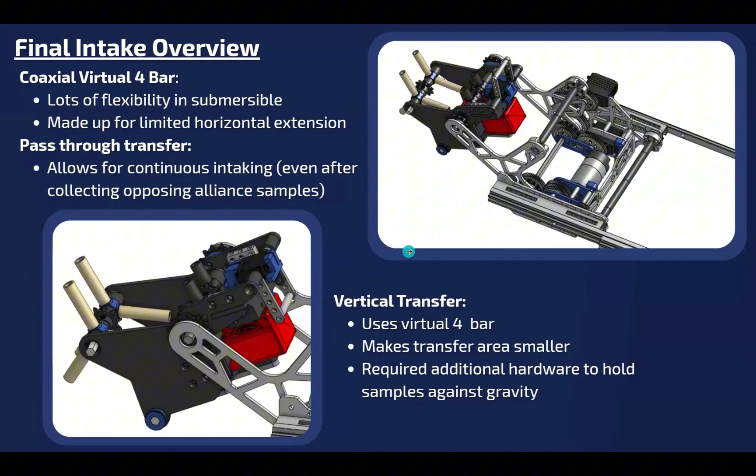But obviously with this functionality that we added, it introduces a lot of complexity. It introduces failure points. So we had to do a lot of things for solving that. So this is the intake positions I was talking about. There were 3 main ones. We have the normal intake, and this is kind of standard. This would be how we would intake most of the time when we're just going as fast as possible. The intake's just touching the ground. The noodles are almost at the ground. And we can intake pretty nicely this way.

And then we also have a vertical position where the submersible had a barrier around the edge, and sometimes samples would get up against that barrier, and most teams cannot intake that. So we were able to lift it up, point the intake down, and that gives us the ability to intake a sample that might be stuck on the wall of the submersible.

And then finally, this one here, that is our vertical transfer position. So this is how we will actually transfer the samples from our intake to our deposition, which is just good for size. Obviously, this is a lot smaller than a lot of other designs. It may be slightly taller, but that wasn't really an issue for the way we packaged our robot. And in general, this was definitely something that took a lot of iterations because the vertical transfer is kind of an issue, especially since you're fighting gravity with the samples. But we had ways to solve that.

Going back to this page, it's hard to see here, but there's a compliant flap that will lock the sample in place at the top. And that allows us to turn the intake off without the sample falling out, which was really good for the transfer.

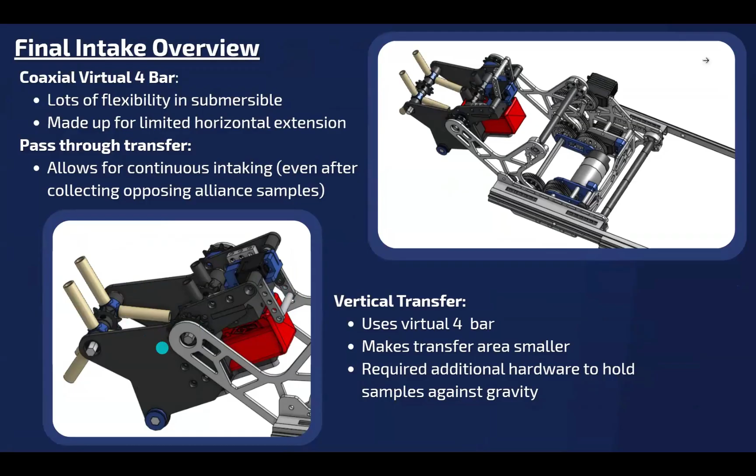Okay. And then, as I mentioned before, we did a full robot redesign going into the World Championship last year. And so this was the intake for the original robot. This was the one that we used during our league meets and our state competition. And we actually won the state competition with this intake and the different robot. So this one is a more typical design for last year with the single drop down. It's just on a pivot. We had a much wider design originally to kind of make it easier for the drivers.

And then we also had a larger transfer box area with trap doors that would open, and that was how we were able to reject samples that might have been the wrong color or something like that. But this was a lot simpler. Definitely worked. It wasn't necessarily more consistent, but it was very consistent most of the time. Although one of the issues we had with this is because we were dropping it straight down, it would sometimes get stuck on the sample, and then we'd have to move around a little bit.

It was also just bigger and heavier, which means it's more strain for the servos, and it also just makes our robot heavier in general. And then also, since it's on the end of the extending horizontal slides, that can cause kind of a cantilever effect on the slides, which may bend them. It didn't really ever have that issue, but it might have if it was heavy enough. The main benefit of this was the transfer was really consistent because the sample was always in the exact same place, and we never really had any issues with samples falling out or anything like that.

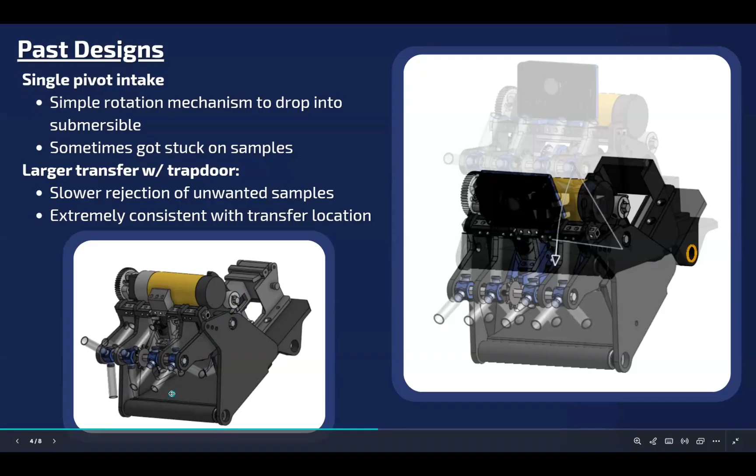Although it did have a slightly higher rate of jamming than the redesigned version because it was so big, it could intake multiple samples at once. So we were able to mostly avoid that in this design through some software solutions, where we were able to automatically reverse the intake to clear it whenever we had gotten one we wanted,

and things like that. So the key differences between the two designs, and this is really what I want to highlight for the presentation, is obviously this design has a lot more degrees of freedom. We have the coaxial virtual 4-bar, which is how we actuate the intake, but that adds failure points.

We also swapped a lot of things from the original version, which we probably should have tested more, and that caused problems at the World Championship with inconsistencies that we had not foreseen because we had just not done enough testing.

So like a smaller intake area, which obviously makes it slightly harder for the drivers, although it added accuracy, which ended up being a net positive. That accuracy made a huge difference for our autonomous mainly. It allowed us to get more cycles in and be less likely to have jams or intake the opposing alliance's color, which was definitely a problem last year with penalties and all that.

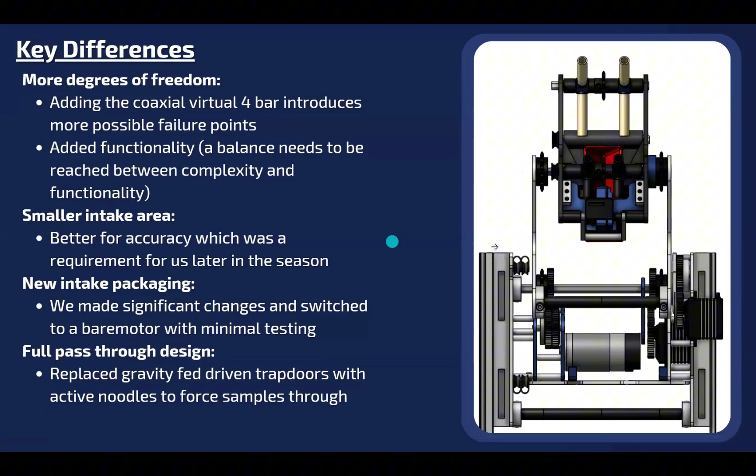We also changed the packaging entirely. So now, instead of everything being packaged on the intake, there's bare motor packaging. We have multiple servos here for actuating the 4-bar, and the whole structure ended up being more complex. And then pass through, which I mentioned before, but that was a major change with the vertical transfer and how we worry about that whole thing.

And then mainly creating reliable designs here. There were a lot of things that we should have done differently. And this is what I want to talk about, mainly highlighting testing everything as much as possible. We like using test beds, and this is something we're really doing this season: every design is being put on a test bed and tested thoroughly before it is even put on the robot or we even think about running it at a competition, because we need to know all of the points it's going to fail.

And if those points of failure end up being too much to deal with, or we can't solve them, or especially if they break the robot for the whole match, that's a huge issue. So we had a couple of those. Some of the examples, aside from in general not testing enough, were with changing to bare motor. This was the first time we'd ever used bare motors before, so this was a huge change for us.

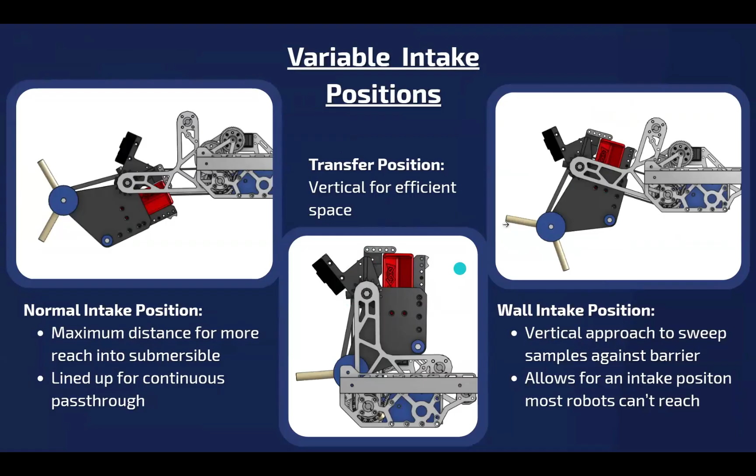We also had a similar issue here with the bare motor reduction, where we had this press-fit bare motor gear and then 2 stages of gearing, which wasn't quite as big an issue because the backlash is irrelevant with the active intake. Although with the bare motor, one of the issues we found was at one of our competitions, the gear came off the motor and it was almost impossible to get it back on.

And that caused some serious issues for a couple of our qualification matches until eventually we were able to fix it in between the qualification and the playoffs. But that was something that we definitely could have known was an issue if we had done sufficient testing.

Additionally, for bare motors specifically, I think I would recommend trying belt reductions as well. The gearing reduction was not ideal. It wasn't very efficient, and the gears on our bare motor at least did not seem to mesh as well as we wanted with the normal goBILDA gears. Not quite sure why, because they're supposed to be the same, but it's possible we just had bad gears. Either way, now this season everything we're using is the hex axle, and then we'll just do the normal pulleys for belt reductions and stuff.

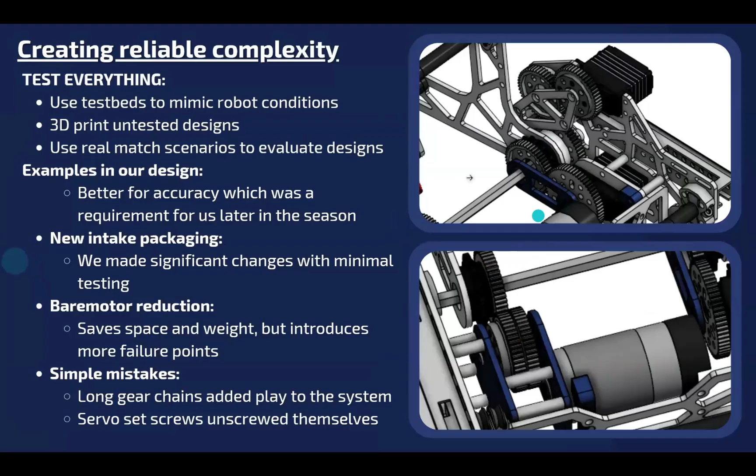This kind of design could have definitely been made for our season if we had gone through more iterations. But again, that comes back to what I was saying about really testing all your designs and making sure you put your designs through a lot of rigorous iterations just to find problems like this and then find solutions.

And similar to what Seattle Solvers was talking about earlier, master sketches are really good. And we did top view sketches for this that outlined all the components. And that's how we were able to find out that this packaging was viable. Whereas here, we definitely did a little bit, but we just didn't try enough versions to where we never figured out how to fit everything in the nicest way possible. So multiple iterations has really helped us balance the complexity of our designs and then also make them reliable.

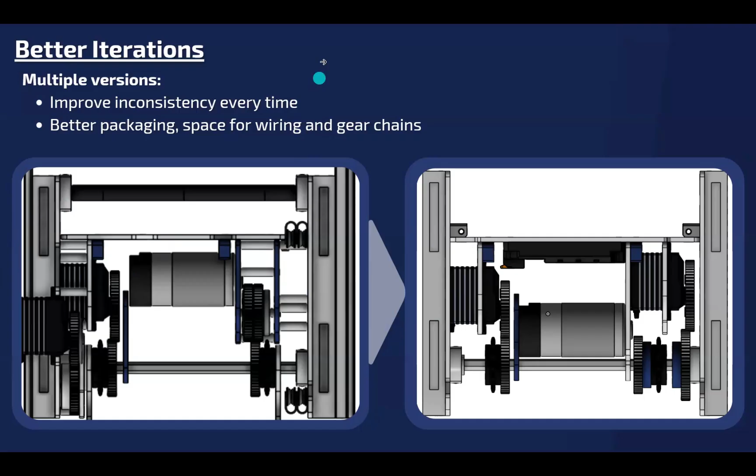And that's something we're taking into this season as well. Right now we've already been through, I think, 8 or 9 different intake versions, whereas last season this was only our fourth complete version. So just even the number of versions that we've gone through has been really good. That's kind of all I have.